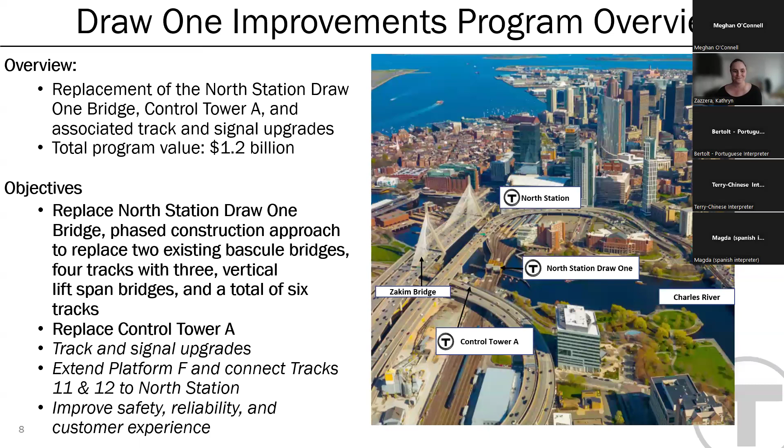And with that, I'm going to turn it over to our project manager, Karl Eckstrom. Thank you, Katie. Good evening, everyone. Thanks for joining us tonight to talk about the Draw One Bridge Replacement Program. My name is Karl Eckstrom. I am the MBTA Senior Director of Capital Delivery Bridge and Structures Program, and I'm also the project manager for the Draw One Bridge Replacement Program.

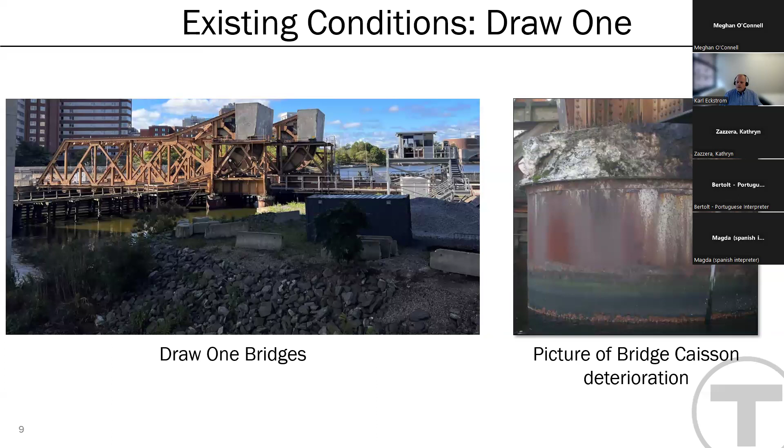North Station dates back to 1857, and in the early 1930s, the new bridge structures, collectively known as Draw One, were built to replace earlier structures in the same location. So here we see photos of the existing condition of Draw One. On the left is a view of the current bascule bridges and the current Control Tower A. And on the right is a picture of an aging bridge caisson, or support, that's actually out in the riverway.

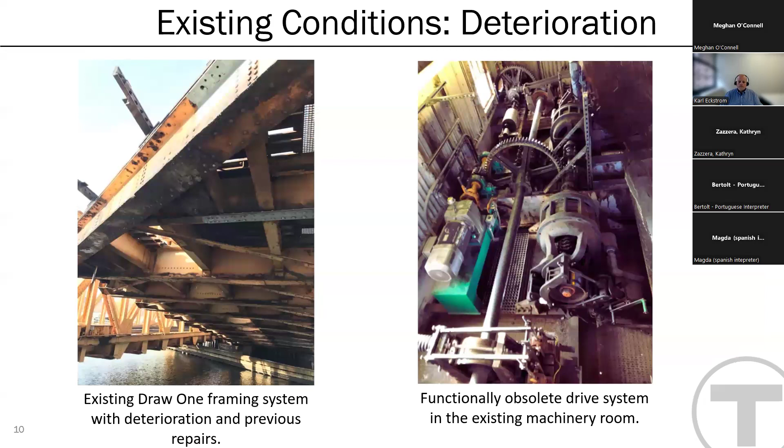Draw One is showing signs of deterioration and aging. On the left is a picture of the framing system showing deterioration and signs of previous repairs. And on the right, you can see pictures of the obsolete drive system in the existing machinery rooms. This equipment is a challenge to maintain and to keep functional to keep the bridge operating for navigational openings.

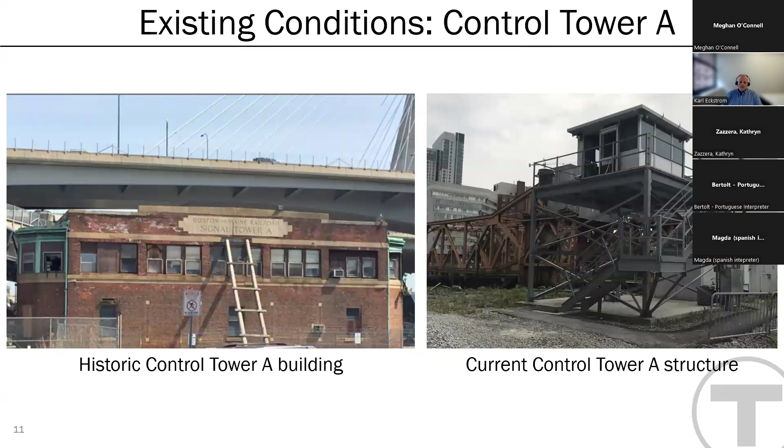As part of the Draw 1 bridge replacement project, the scope includes replacement of the existing bridges with a 6-track crossing of the Charles River, consisting of 3 vertical lift movable bridges, 2 new river tracks to allow for improved service on all the commuter rail lines into and out of North Station, and a replacement of the existing trestle structures out over the river between the shoreline and the 3 new lift bridges.

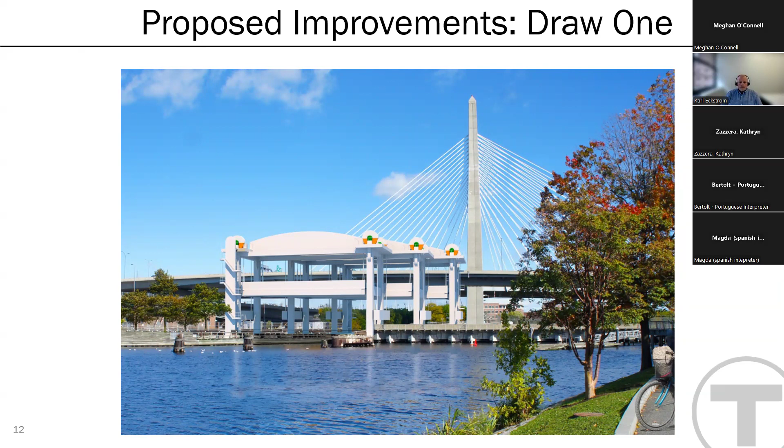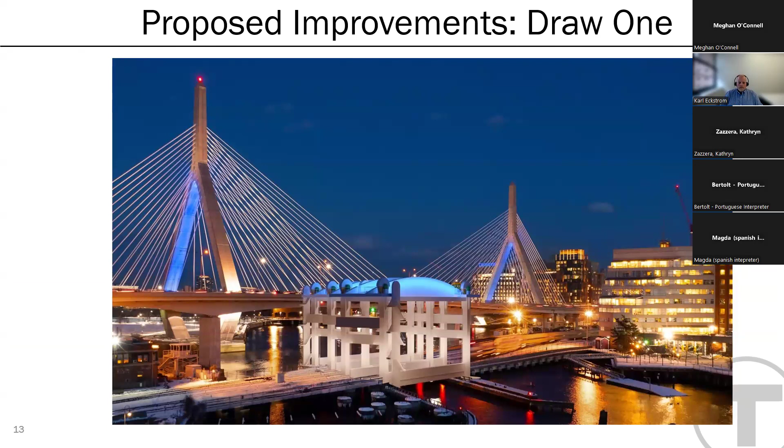The program plans to construct a new Control Tower A building to house all of the rail operations and maintenance components, and to provide operation control of all 3 of the new replacement movable bridge spans.

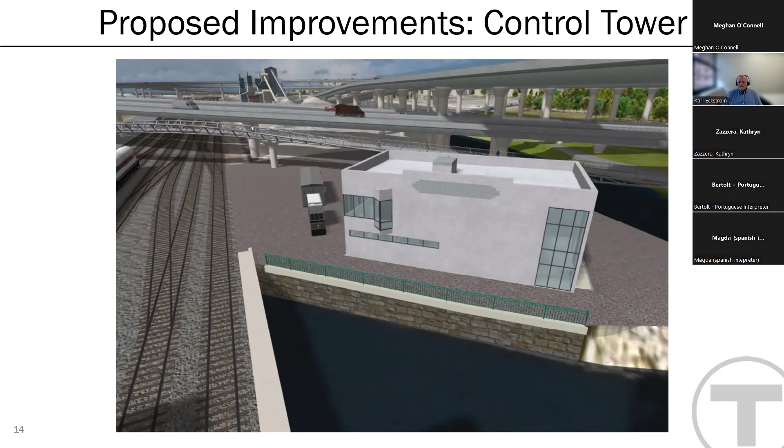The design team has identified a conflict. Oh, sorry, wrong slide. Sorry, get myself out of place.

We're going to talk about proposed improvements. Temporary construction will require the use of trestle work out in the riverway.

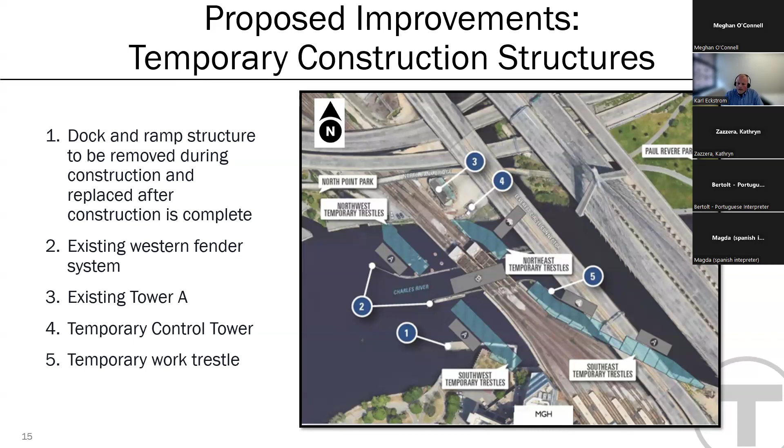And as I mentioned, we're going to have a number of temporary work trestles.

Just to give a better feel of what that construction activity will look like, here you can see equipment out on those temporary trestles and the erection of the first of the 3 framing towers for the new lift span, immediately adjacent to our 2 existing bascule bridges and the associated steel framing that will support the trestle approach spans out onto the new bridge.

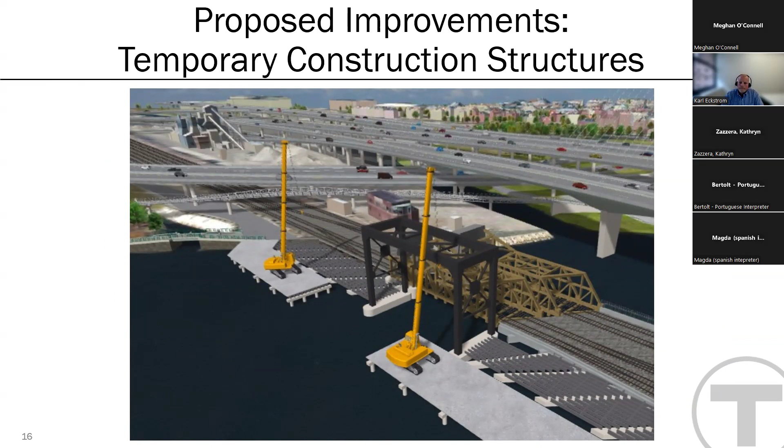So let's talk a little bit about what we've been doing as part of the project. We have been working on federal and state coordination efforts. We have a NEPA environmental assessment that is ongoing, and part of the program tonight is to allow the public access to some of the materials we've developed for that documentation purpose. We have been working with Section 106 consultation and tribal consultations as part of the environmental documentation.

We've also been working with our partners at DCR on Section 4F impacts to the parklands, as well as the National Flood Insurance Program.

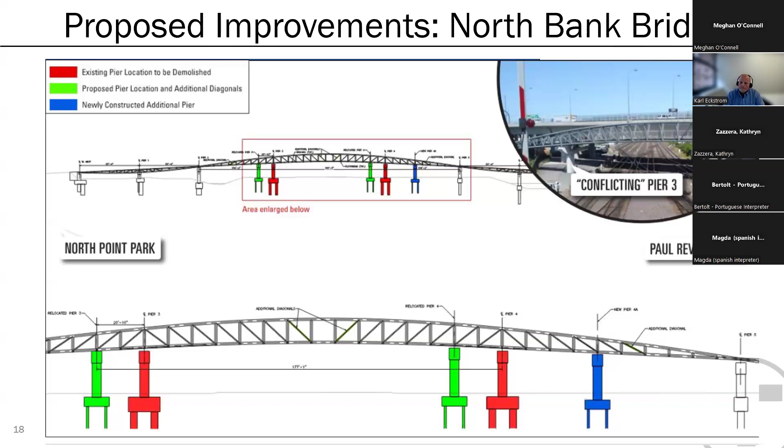As I mentioned earlier, part of the environmental documentation includes historic review, and our Section 106 process has been ongoing. This process is an integral part of the National Historic Preservation Act of 1966. It identifies and assesses the effects of actions that may have on historic buildings or structures. Both of our bascule bridges and the Tower A control tower, even though it's no longer being used, has been identified as eligible for the historic register.

Therefore, they're part of this mitigation effort, which is to resolve adverse effects by developing and evaluating alternatives that could avoid, minimize, or mitigate impacts on those historic resources. I'd like to thank our partners at the Mass Historical Commission, the City of Cambridge, and the Boston Landmarks Commission for their efforts working with us to mitigate the impacts of this project on those elements.

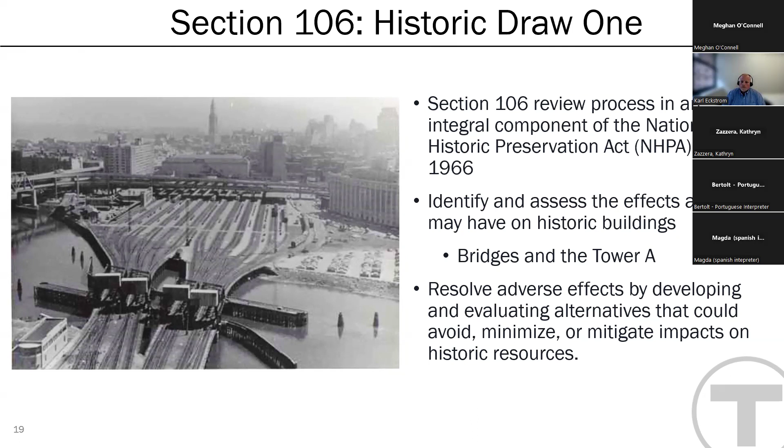As far as a Section 106 timeline, we first notified those agencies through our federal partner at the FTA of an architectural survey and effects assessment back in 2023. We started meeting with those agencies on this issue in mid-2023, and have had several meetings and consulting party negotiations on the impacts of the project.

Most recently, we met just last week, and we have ongoing meetings planned throughout the latter part of summer and next fall to resolve and finalize the project's memorandum of agreement with those agencies so that they have a continued role in the design development and some of the construction aspects of the work. So thank them for their participation in the project. Next slide.

As far as next steps, the team is going to continue design of the bridge and elements of the project. We're going to continue to look for construction funding, and we're going to continue our efforts with community engagement, which is part of the reason we're here tonight, to talk about the project and gain some feedback from our interested passengers.

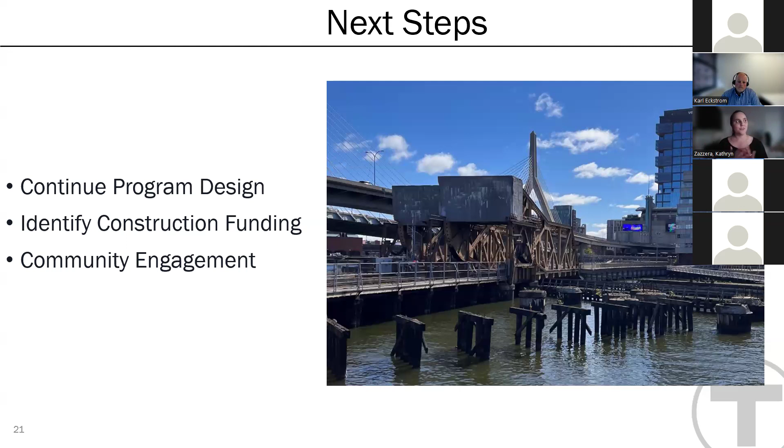I very much so appreciate all of you who have stayed with us for this hour and a half and have advocated vehemently on behalf of your communities. It is very important. We take all of these comments seriously and do intend on passing this along to our partners at DCR, MassDOT, as well as internally with us as we pursue this program, and also continue to coordinate with DCR relative to the pedestrian bridge that we spoke about so much tonight.